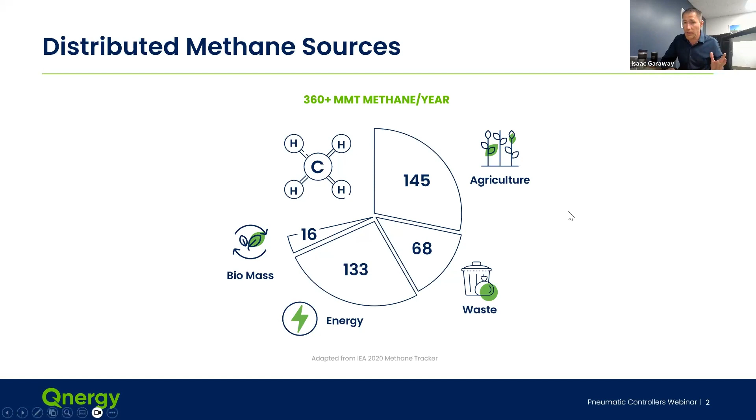So we're all aware of the methane challenge. One of the things that makes methane more difficult than other gases or other challenges is that it's extremely distributed. It's not only distributed across pretty much every sector of our society and economy, it's distributed geographically. In many cases, the largest methane emissions in our country are remote by definition. And so accessing those, not just quantifying them but resolving them, has become an issue. That's what we're here for, and that's what we're all about.

So this is a graph that you guys are well familiar with in this forum. But essentially it quantifies, or attempts to quantify—and there's some discussion as to whether the leak rates are higher or lower—the key sources of methane releases from within the natural gas industry. In some cases, these leaks are fugitive leaks. They're unintentional, they're happening, and we try to find them, quantify them, and fix them.

In other cases, however, the leaks are intentional. They're part of the control process. They're part of doing business. We actually intentionally, every day across the United States, are releasing hundreds of thousands of standard cubic feet of methane into the environment. And those are specifically what we're going to be addressing in the talk today. But if we have some time, we'll talk about some of the fugitive releases as well.

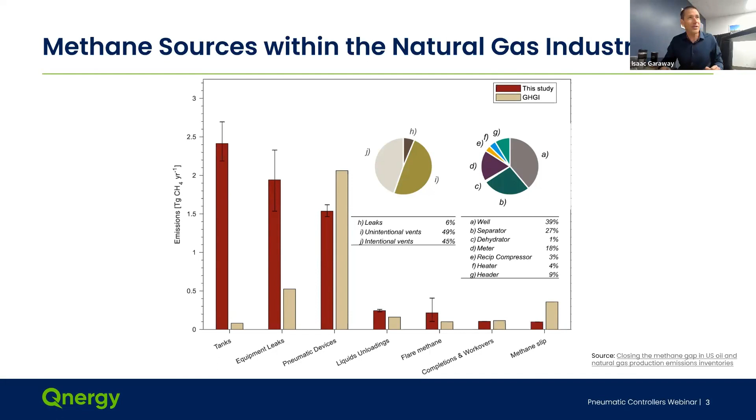So a conventional system, by nature of the fact that well pads are remote—upstream natural gas well pads being distributed out across our nation, somewhat disconnected from our utility systems—had to figure out a way to power themselves. It was a really efficient and effective means: if we go back 40 or 50 years, we'll just use the pneumatic power of the gas to power the well pad. And that's how we've built an industry.

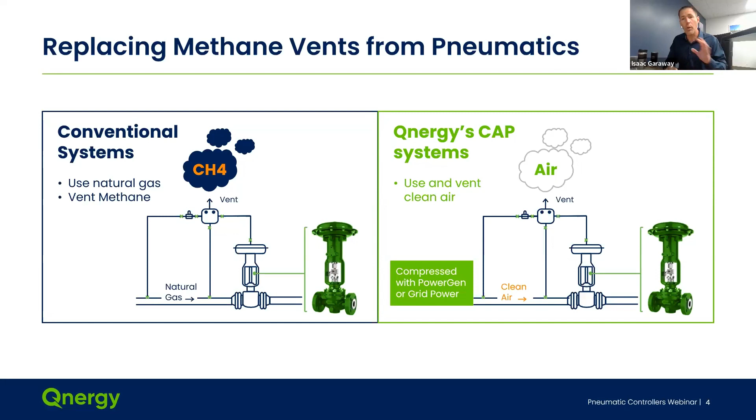And this conventional system, however, is proving to be not only lossy from an energy perspective, it's becoming environmentally harmful and a concern. So what we've done is come alongside these well pads and said, we're going to provide you a reliable, continuous utility connection, but without the utility pole. We're going to give you the power you need to address those power needs, whether pneumatic or other, automation and others, so that you can run that same well pad just as effectively, just as reliably, but without having to deal with the methane emissions.

Basically, our whole technology is based on our generators, which is a continuous run, base load, reliable generator, designed to run off raw methane, unrefined, directly out of the ground, and convert methane into electricity. Now, we can take a fraction of the methane that would have been normally released within the normal operation of a well pad, and we convert it into power, and we convert that power into pneumatic power.

So we have additional devices that plug and play with our power generators, and they produce pneumatic power. So you have electrical power and pneumatic power, which then can provide a well pad a really seamless transition away from using methane as its pneumatic source of power to using compressed air. So basically, in the broadest sense, that's what we're doing. And we'll dive a little bit deeper now, and discuss how we actually go about it.

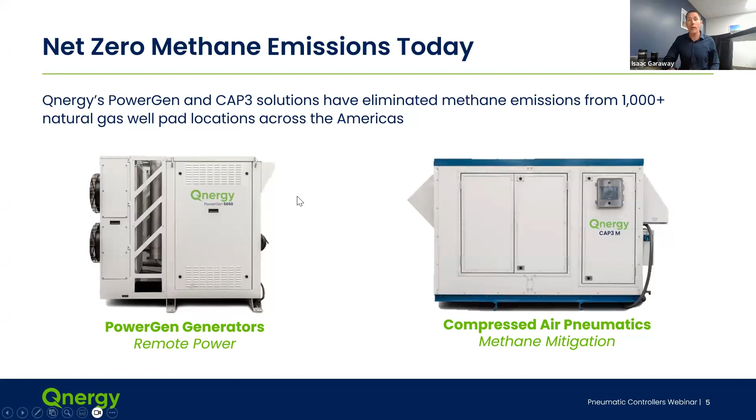So we take unrefined methane and we turn it into continuous, reliable electricity in the small power range. Most well pads, funny enough, even though they're producing millions of BTUs an hour in many cases, and they power our industry, they themselves actually do not take too much power. A typical well pad is consuming roughly on the order of 200 to 400 watts of electrical power.

And then roughly, if you look at the pneumatic power that you need, depending on the size of the well pad, whether it's 2 wells or 4 wells or 6 or more, you're typically consuming maybe 400 to 500 watts per well in pneumatic power. So if you have like 6 wells, that's maybe another 2 kilowatts and change in pneumatic power. So it's actually not a lot of power that these well pads need.

Historically, getting reliable, continuous electricity out to those well pads has been a challenge because at the small scale, a reliable source of electricity doesn't really exist—definitely not one that works off the raw, unrefined, untreated fuel coming out of the ground.

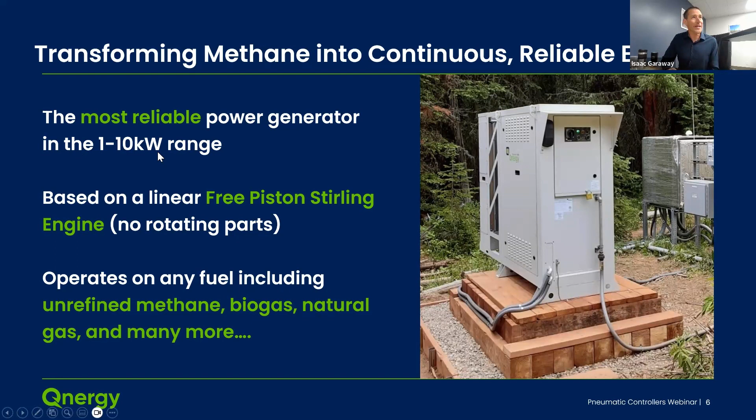So the Stirling engine has been around for a couple hundred years. It's not necessarily known for its energy density or its ability to accelerate, but it does a couple of things really, really well. And it was always born out of a need by some of our, not just Department of Energy, but also Department of Defense and the space industry, to provide continuous base load power for non-terrestrial applications.

And there we stand alone among the stars. Literally, NASA declaring that we were the longest running heat engine technology in the history of civilization. It's really as a result of some work we did in the late 1990s, early 2000s, where we fielded a number of engines with NASA that have been running continuously now for 120,000 continuous hours. And if you do the math on that, you realize the magnitude of if you translated that into, let's say, an automobile engine or a diesel generator running for hundreds of thousands of hours continuously.

It's something that just isn't really, it can't be done under the same umbrella or the auspice of that technology. So we have a really reliable technology that, funny enough, has a fringe benefit that it can run on pretty much any fuel that you can turn into heat, when we can then convert into electricity. Primarily our work within the space industry was with nuclear radioisotopes and other forms of heat generating energy sources.

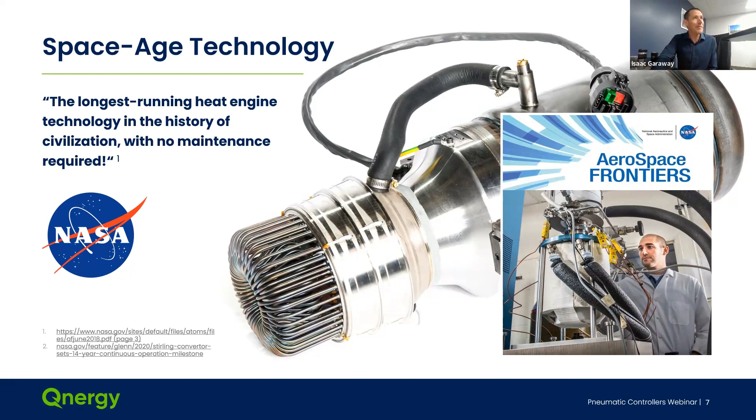In the natural gas industry, we take what's available to us, which is the raw unrefined methane. We take that raw unrefined methane, and I don't want to go into too much detail of how the engine works, just for the sake of time. I'd be happy to share with any one of you guys in more details, so if you want, just reach out to me and I'll be happy to do so.

But basically it takes an external form of heat. So as long as you can convert your fuel into heat, which we do using an extremely efficient combustion chamber, which I'll discuss briefly in another slide, we convert your methane or natural gas into heat. We can then convert that heat into expanding gas. Our engine is a hermetically sealed cylinder full of helium, an inert gas. As that heat gets impacted upon, the helium expands. The expanding helium forces an internal piston, which we call the displacer piston, to move backwards. It then provides a pressure wave on the power piston, which then converts a linear movement into the movement of a magnet. And the magnet, through electromagnetic field, creates an electric voltage, and that electric voltage then produces power.

Okay, so very briefly, you have a hermetically sealed vessel. If you heat it on one side, you can get gas expansion. If you cool it on another side, you can get gas compression. And that oscillating expansion and compression of gas forces the movement of a piston, which then forces the movement of a magnet, which then forces power. Really, really simple. You heat something up, you cool something down, and you get electricity.

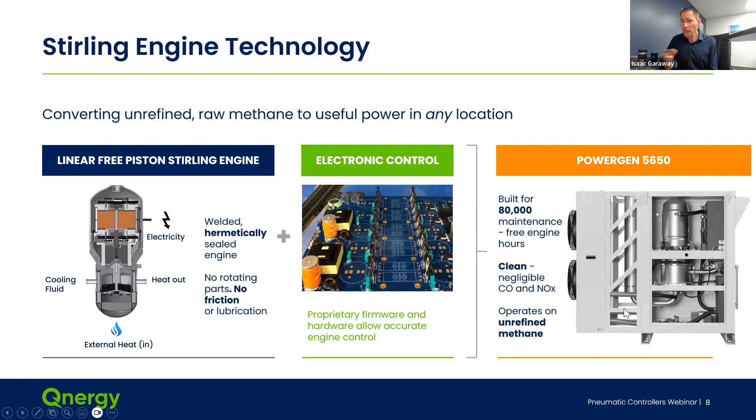Our generators are designed to work continuously, reliably for tens of thousands of hours, with very low levels of carbon monoxide and NOx. When I say low levels, we're talking two orders of magnitude lower than a comparable diesel generator. Between 1 to 2, depending on how you do the math, but we're talking a huge disproportionate reduction in NOx and carbon monoxide, and all of this off unrefined methane.

We've done some tests with our combustion system compared to best in class of other technologies, so fuel cells, as well as thermoelectric generators, diesel engines that are internal combustion engines. And if you look here at the comparison, we're top of class when it comes to methane destruction. So we are turning those methane molecules into CO2.

In order to oxidize methane, you have to produce CO2 in order to get heat. That has to happen. But we do it very, very efficiently, to the point where one of our tests came out at 100%, the other one came in at 99.99%, simply because of the level of the sensor and its sensitivity. But in all practicalities, we essentially convert all CH4 into heat and CO2.

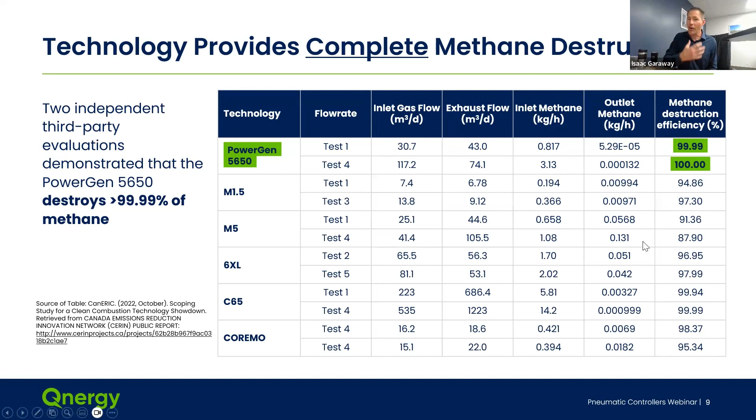In comparison, some of the other technologies, for example internal combustion engines, are known to be quite lossy. They have what's called seal blow-bys or leak paths of methane. So an internal combustion engine working off natural gas - many of our backup generators spread out across the country thankfully only work a couple hours a year - when they operate, they are leaking 1, 2, 3% of their methane out of the seals of that internal combustion engine by nature of its operation. That's something our continuous run generator does not have.

So we can take our generator that converts methane into electricity, and we plug it into a redundant compressor package, which is designed to convert electrical power into pneumatic power. We do it with a number of features and elements that specifically meet the demands of the natural gas industry. We have redundant air compressors designed to complement each other. We provide notifications and alerts to customers regarding their airflow and air capacity at different times throughout the day, depending on the different pneumatic controls being used.

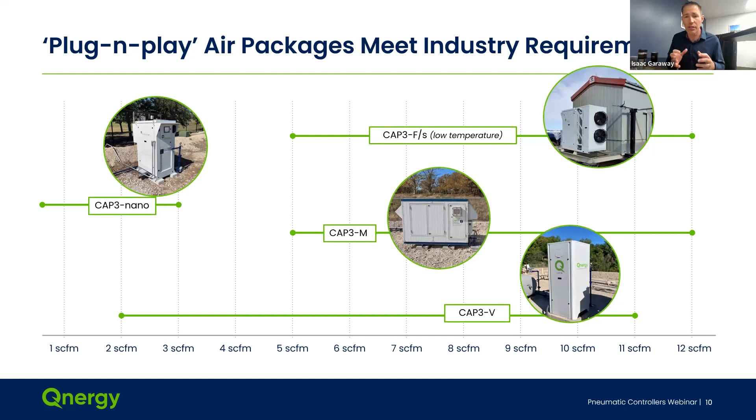Most importantly, we provide a suite of solutions. We have one well pads out there, and I believe our largest well pad we're serving today is a 20 well pad down in Texas. So pretty much anywhere between a 1 well pad and a 20 well pad, you have different air usages, and not one size fits all in this case. So we have a variety of air compression packages designed to meet the different needs of those different well pads. So when you look at the cost of compliance...

The real issue here is really the natural gas industry - from my experience, and we've been out in the field now for a good couple of years implementing these things - they want to mitigate their methane. I really can say that as honestly as I can. Sometimes we like to, I don't want to say demonize the natural gas industry, but in my experience, most well pad operators, if they know they have a leak, they want to address it. In some sense, there's financial gain, especially when natural gas prices are high, to preventing that leak.

But the problem generally is it costs money to save money. So they're always looking at how do we save this methane leak in a way that doesn't break the bank. When you do the math of using a technology like ours, one of the benefits is it doesn't require any retrofits of any equipment on the site. They continue to use their pneumatic controls just as they use them. They don't need to upgrade or change any of their control systems or network systems.

Everything remains exactly the same. The only thing they're doing is essentially turning the valve off for the methane feeding the pneumatic valves, and displacing it with air. When you do the math on the cost of integration of an air package instead of a methane package, we're talking very, very low levels - and this is prior to a fine or a regulation. When the regulation actually begins to fine these operations for their methane releases, it becomes a profitable venture, pretty much from day one, both from a capital expense and an operating expense standpoint.

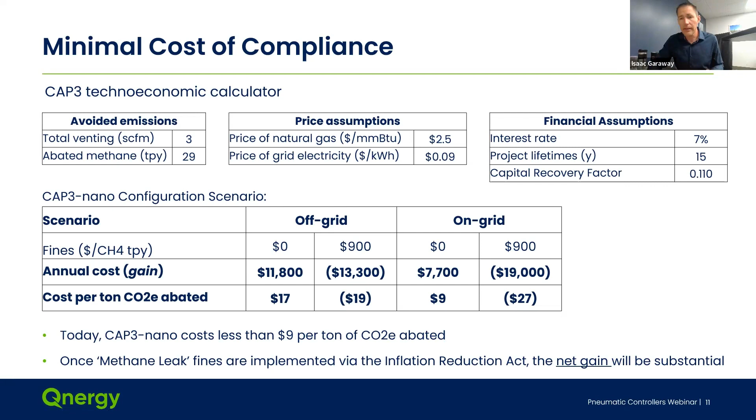So the young lady earlier was talking about data and data analytics within methane. A huge part of what we do is data analytics, not just in terms of finding the leaks, which is a huge portion of what much of this forum has been recently concerned with - how do we find the leaks and how do we quantify them.

But we go so far afterwards as to begin to calibrate our operations as a function of what that data is telling us. All of our machines not only feed back power levels, but they also feed back air usage levels. So the user can not only see how much power his well pad is consuming, he can begin to learn what different portions of his pad, if segregated, are using at any given time of day - meaning the specific pneumatic usage.

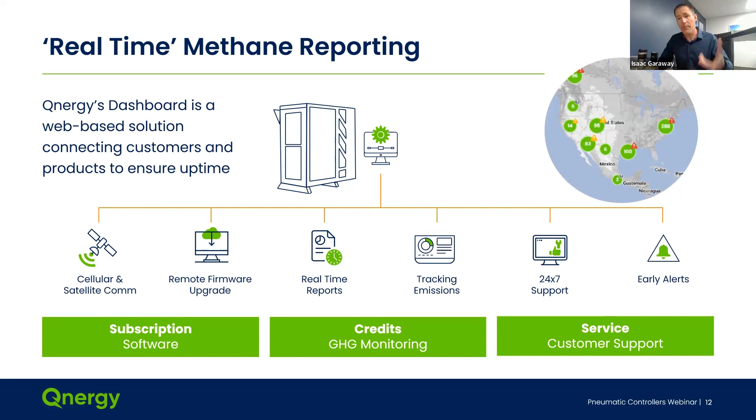And so when a leak develops, he can then get ahead of it. The ability to not only control but also monitor in real time provides a huge amount of power - not power from an electrical perspective, but the ability to impact change upon that well pad, because of data.

Now, up until this point in time, this well pad has been active for roughly 10 years. So for the last 10 years, this well pad has been emitting to the environment 12 standard cubic feet of methane per minute, for years. Their calculations, however, showed that they should only be emitting something like on the order of 3.

And we're seeing that in real life as we're implementing these packages. We're getting the aha moment as our customers are connecting up and actually measuring their actual leak rates. They're saying, wow - in some cases it's better, but in most cases it's been a lot worse.

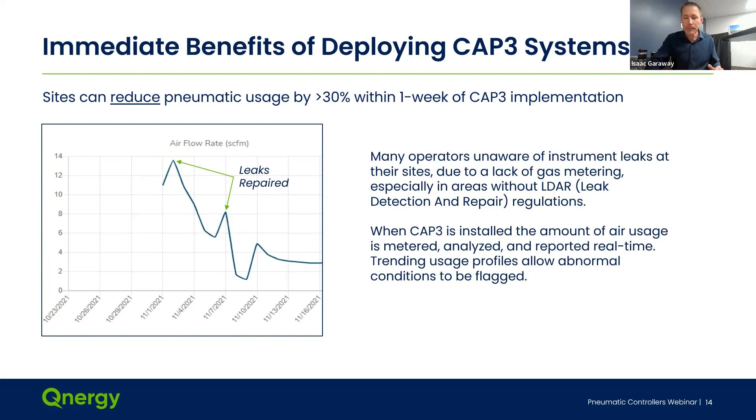Now, what happens when all of a sudden something changes? We have a tool within our database which can look back historically and say, for the last week, a certain well pad has consumed 2 standard cubic feet per minute, for example, averaged at minute intervals. And now all of a sudden, in the last 5 minutes, I've seen a spike - I'm now consuming double the pneumatic power. That can be communicated back out to a user.

Not that 4 standard cubic feet per minute in itself is alarming, right? Because many pads are running at even higher rates. It's the fact that you've seen a certain pad that our data has taught itself should be working at a certain level, now working at a very different level.

And it goes in both ways. If a normal healthy pad should be consuming 2 standard cubic feet per minute of air, and all of a sudden drops to 0.5, maybe one of your wells has shut in. Maybe one of your valves is now plugged. You're not consuming the air that you thought you should be.

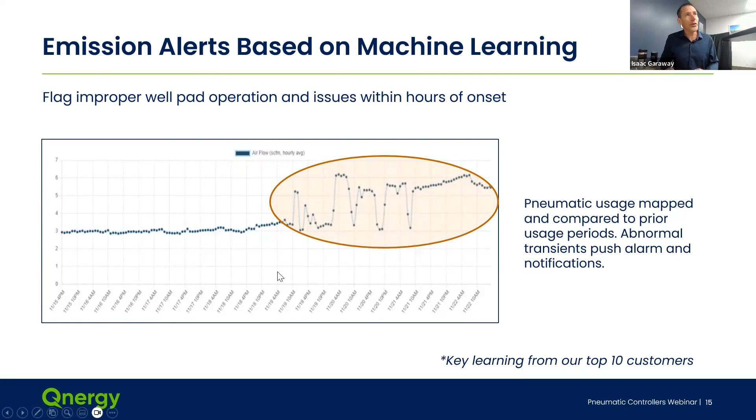So we can provide a bunch of diagnostics to operators based off machine learning - that's a big word. I don't intend this to be the full meaning of machine learning, but we do learn the behavior based off history, and then we can predict future behavior. When that future behavior is not met, we can flag it and provide the user that input. Those are the kind of interesting things we can do with data.

Another interesting thing is that once customers have addressed all their leaks and their pads begin to operate effectively - according to the calculations that a vent should vent to - we're finding that the initial estimations are actually lower than initially assumed. There's a certain level of buffer that many operators were putting upon themselves, saying, well, all the vents together should be at 2 or 3, but I'm going to assume I'm actually running at 6, or I want to run at 9.

Give me a package that can do 9 standard cubic feet per minute, even though my vents should only be consuming 3, because I need a buffer, because I know I need to address leaks. If you take our top 10 customers - and this data represents hundreds of sites, not 1, 2, or 3, we're talking hundreds and hundreds of sites.

You can see that the average usage for a typical 4 to 6 well pad is roughly about 2 standard cubic feet per minute, which going back to the numbers really makes sense. It took time to get there, right? It doesn't happen overnight. It takes a couple of days, and they need to assess, fix and resolve the different issues. But from a long-term perspective, it's not a huge amount of air.

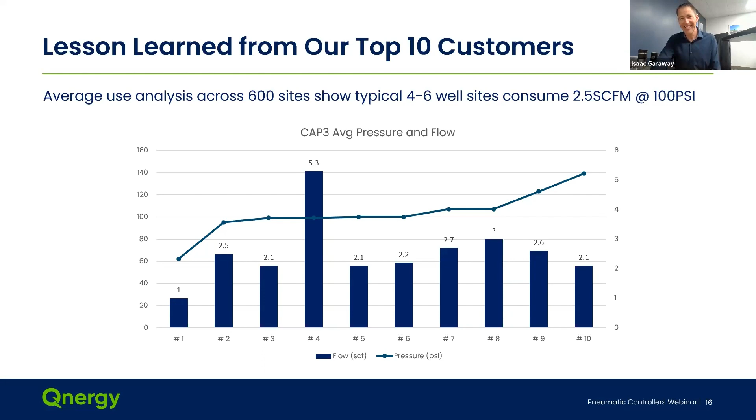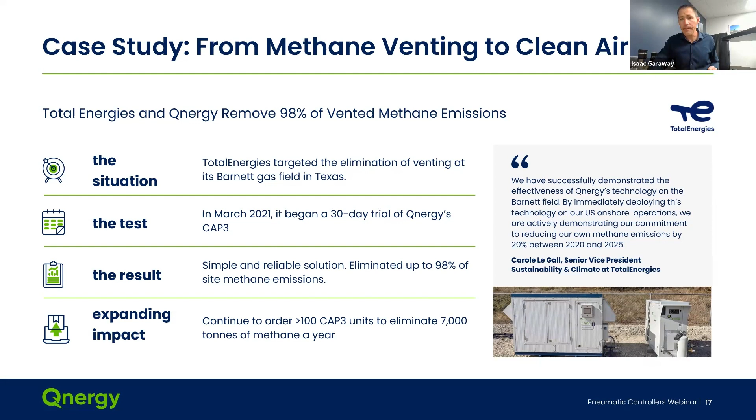You have raw, untreated, dirty methane. That's a liability. It really, truly is a liability, and it's becoming a liability. So what do we do with this? The idea behind our technology is, can we take some portion of this liability and convert it into revenue, convert it into some sort of margin tool.

I really like this statement: these are leaks which are too large to ignore, but too small to have a really good solution for. That's what we're trying to do. We're trying to address those leaks which are too large to ignore, and we have a small solution, but small solutions—sometimes small is good.

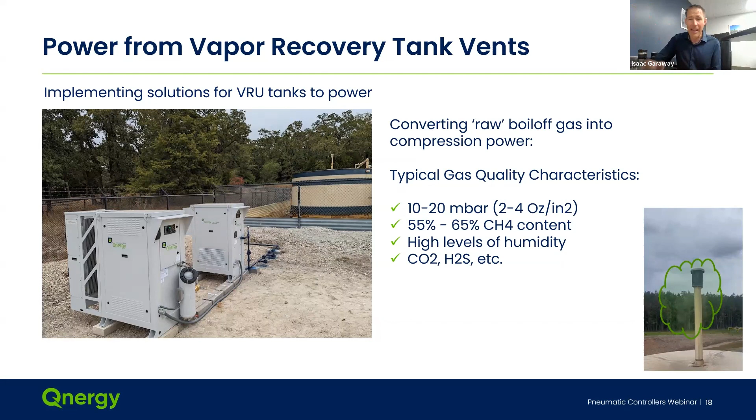Landfills, the same thing—we have some applications within landfills. These are closed landfills, old landfills, landfills that aren't connected to the natural gas network. They don't have sweetening facilities to convert the landfill gas into renewable natural gas. What do you do with it? At best, you flare it, and that's really been the challenge—at best to flare it. Just getting flares on some of these landfills has been a challenge and a half for local regulators. In most cases, it's just vented to the environment. So how do we provide a solution that can deal with these leaks, which are, frankly, too large to ignore?

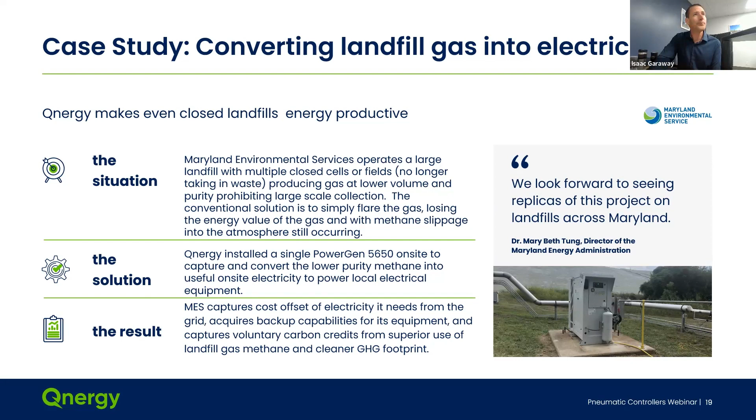From agriculture, we've done some projects within the agricultural waste sector, converting animal manure, as well as in some cases food waste, into biogas, which we then convert into electricity, which then can be used to benefit a variety of different things within that agricultural sector. So each one of these are very different sectors, but they all have a common theme.

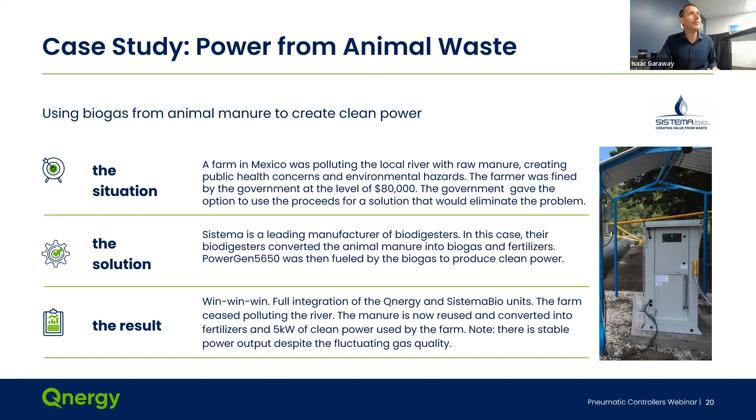We're taking unrefined, untreated, high liability gas—a gas that really no one else can use—and we're converting it into reliable, continuous electricity, which we can use to mitigate the remainder of whatever that liability is. So the key takeaway is: having a remote power generating platform that provides methane mitigating solutions really is key to resolving the distributed methane challenge. Our technologies aren't really fit for centralized methane leaks, but they are very fit for decentralized methane leaks, which the natural gas industry is historically known for—being not only distributed, but remote and off-grid.